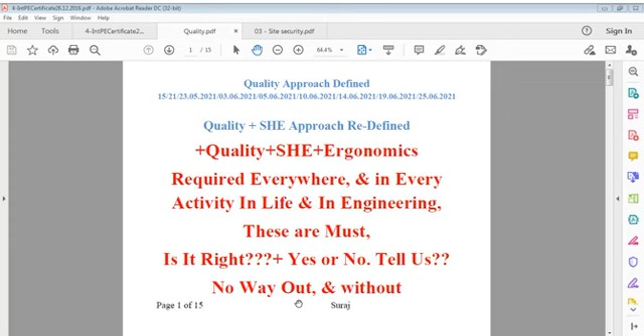It's not a question of spiritualism. It's a question of analytical facts. If we simply analyze, it's interesting, because without analysis I can't justify anything. If I talk based on analysis, on calculations, on logic, on certain forms, on certain references, we can say that the answer, that explanation, is much more powerful than if I just throw something out.

If I say I don't know the reason, but I said that, and I act like that, saying okay, I have told you, you do this, don't think about this, I have decided on this, and you do it - it means I don't know the answer, and I want that person to do it without knowing why. This type of act stands a long distance from quality.

Our quality thinking has gone in vain. We all know COVID is working very fast. It has consolidated its position all over the world, and millions of people have lost their lives because of this power of God. Better you call it the power of God - when something is beyond your control, you cannot answer to that. So it is power of God. What research would say, what investigations would say, I'm not involved with that.

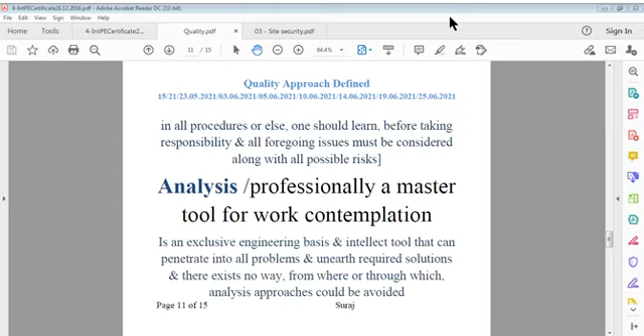Organization of safety on sites, about how to organize on site or on projects our quality system, or you can say safety system.

In construction, we work on sites. That is very much true. Sites are our workshops, sites are our manufacturing unit, sites are our factory, and sites are our operational research centers. Site is our home for work. Generally, engineers spend their time on sites much more than what they spend at home.

General working on site is more than 12 hours, 10 hours, depending on requirements, and then maybe 1 hour or more to and fro journey. So most of the time of your life, in your professional project life, you spend on your work.

That is a fact. Particularly in our discipline, construction, there is no time limit. Contractually, there is a contractual time limit, but physically you have to work as if it is your own work. If you think this is not my work, this is the contractor's work or the employer's work, then you may not be able to concentrate on that because your mind is different.

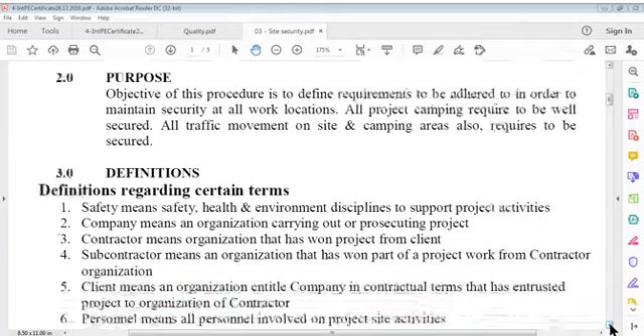There are certain definitions also, we have discussed many times, we have to repeat that for refreshing. It says safety. Safety means safety, health, and environment - disciplines to support project activities. We have learned it, and ergonomics also added to that. Safety means that, and we can say company

from client. It's also clear. You may call contractor, right?

Sorry, some gastric.

Subcontractor means an organization that has won part of the project work from the contractor organization. We have to understand these points very well. We may be engineer or non-engineer, but we may be public.

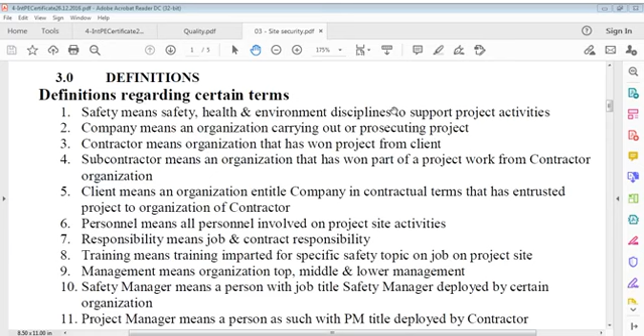Now, client means, I'm drinking water.

Client means an organization that's entitled as company in contractual terms, that has entrusted the project to the organization of the contractor.

Now personnel means all personnel involved in project site activities. Responsibility means job and contract responsibility. And training means training imparted for a specific safety topic on the job, on project site.

Management means organization - top, middle, and lower management or organization. Safety manager or leader means a person with job title safety manager or leader, deployed by a certain organization.

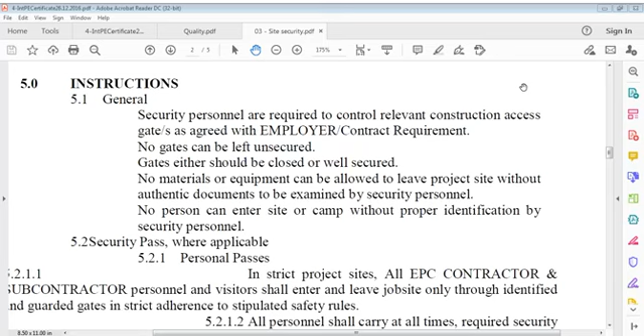This is chapter 2 of safety, health, environment.

I don't know what's happened to me. What's going on?

No person can enter site or camp without proper identification by security personnel, and security passes are available where required, along with personal passes.

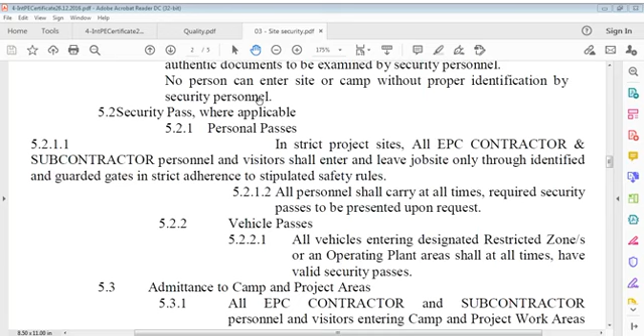All EPC contractors and subcontractors, personnel and visitors entering camp and project work areas must be in possession of required security passes or identification documents.

Personnel shall not be allowed to carry a camera of any kind unless a permit has been obtained from the employer and security police. Personnel and visitors entering camp or project work areas must be in possession of required security passes or identification documents, whichever is applicable.

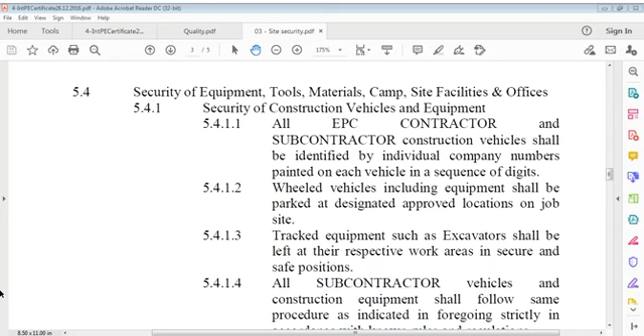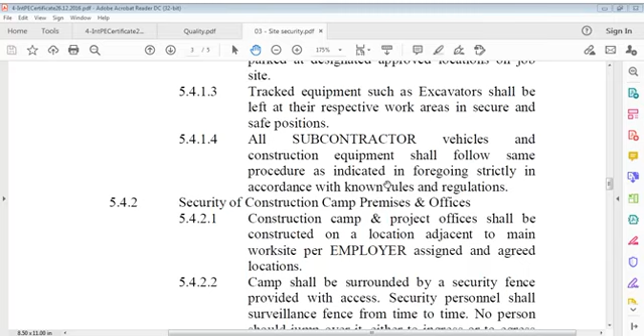Tracked equipment such as excavators shall be left at their respective work areas in secure and safe positions.

All subcontractor vehicles and construction equipment shall follow the same procedure as indicated in the foregoing, strictly in accordance with known rules and regulations.

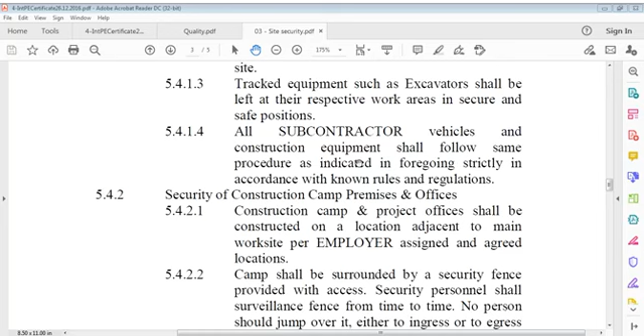Construction camp premises and offices security: the camp shall be surrounded by a security fence provided with access. Security personnel shall surveil the fence from time to time. No person should jump over it, either to ingress or to egress.

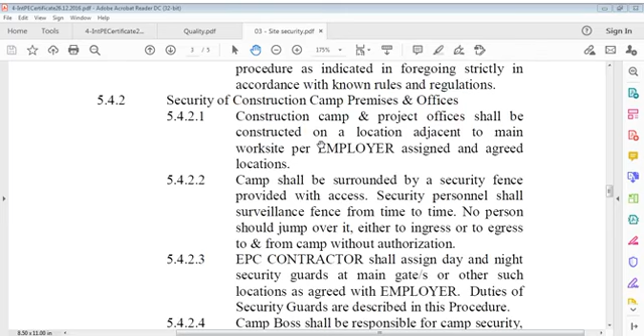The camp shall be... other such locations as agreed with the employer. EPC contractors shall assign day and night security guards at main gates or other such locations as agreed with the employer.

Duties of the security guard are described in this procedure. The camp boss, or camp leader, you can call camp organizer, shall be responsible for camp security, and shall ensure that records identify all permanent residents and that all camp visitors are logged in and logged out.

Facilities shall be guarded by security guards around the clock to avoid unauthorized access by miscreants.

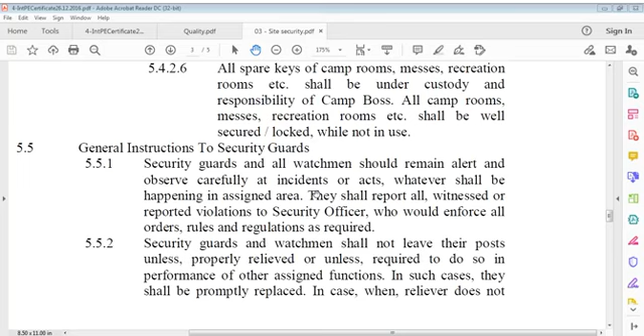General instructions to security guards: security guards and all watchmen should remain alert. All camp rooms, messes, recreation rooms, etc. shall be well secured or locked while not in use. They must be alert and observe carefully incidents or acts happening in the assigned area, and shall report all witnessed or reported violations to the security officer of that area.

General instructions to security guards are very easy: security guards and all watchmen should remain alert and observe carefully incidents or acts happening in the assigned area. They shall report all witnessed or reported violations to the security officer, who would enforce all appropriate action.

Security guards and watchmen shall not leave their posts unless properly relieved or unless required to do so in performance of other assigned functions. In such cases, they shall be promptly replaced. In case the reliever does not arrive...

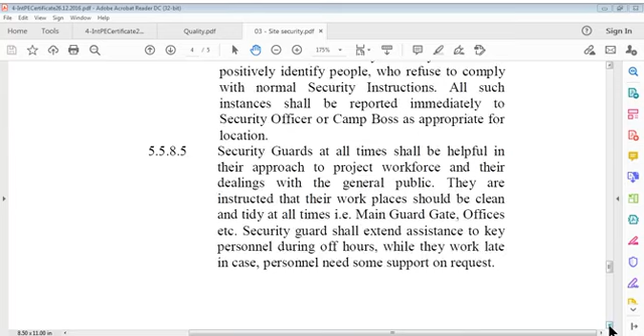Photography on site shall only be allowed if prior written permission is obtained in accordance with employer rules and regulations, and a permit has been obtained from security police.

Following agreement with the employer and/or its security agencies, it is envisaged that employee ID badges shall incorporate an electronic system to afford access and egress to the camp for employer, contractor, and subcontractors. Employees of located subcontractors whose workforce resides outside the project security fence shall also be required to swipe entries and exits to the project at assigned locations when the site is located in non-prohibited areas.

Requirements of many considerations may not work in every case. For example, photographs could be allowed without formal permission, but identification of persons available on site should be recorded, as this is state-of-art practice all over the globe for security reasons.

A visitors' log shall always be maintained, as it tells how many persons have been available on site during the day. Such information may assist in head count in case of a fire breakout.

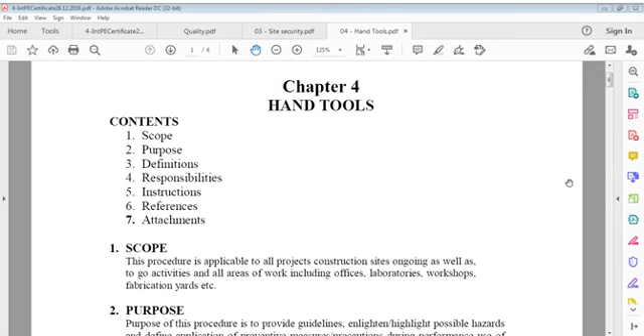We say in every statement there is scope, purpose, definitions, responsibilities, instructions, references, and attachments, and it could go on. Now in hand tools, we can say this is the procedure. This statement or procedure is applicable to all projects and construction sites, ongoing as well as...

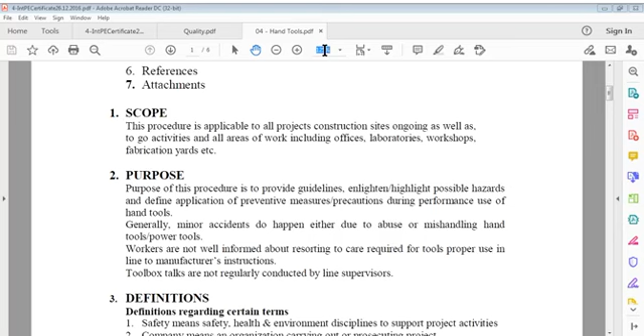To go activities and all areas of work including offices, laboratories, workshops, and purpose is to provide guidelines, enlighten, highlight possible hazards, and define application of preventive measures, precautions during performance, use of hand tools.

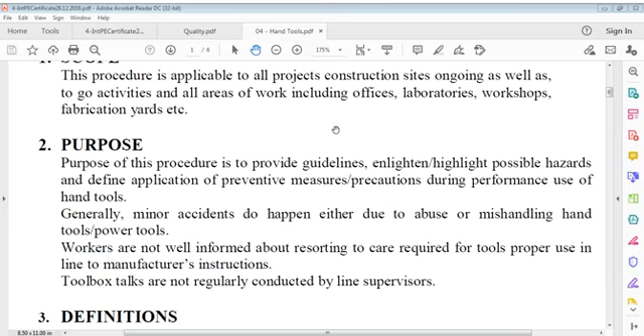Generally, minor accidents do happen either due to abuse or mishandling hand tools, power tools. Workers are not well informed about resorting to care that is required for tools' proper use in line to manufacturer's instructions. Toolbox talks are not regularly conducted by line supervisors.

In definitions of safety, safety means SHE, which means safety, health and environment, disciplines to support project activities, and company means an organization carrying out or prosecuting project or ownership of project. Contractor means organization that has won project from client as a contract. Subcontractor means an organization that has won part of project work from contractor organization. And client means owner, an organization and title company in contractual terms that has entrusted project to the contractor organization.

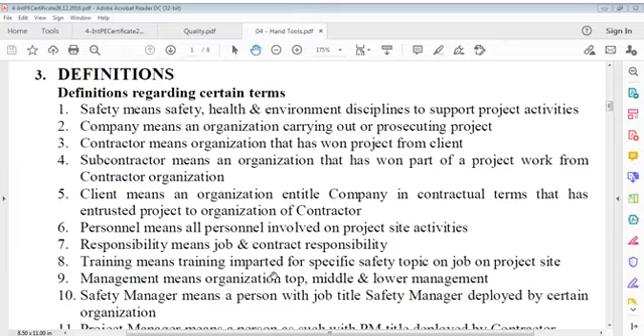Personnel means all personnel involved on project site activities, whatsoever they are, from whatever organization they come in, from employer or from engineer or from contractor or from subcontractor or from whosoever source it comes in, and they stay on site. Responsibility means job and contract responsibility. Training means training imparted for a specific safety topic on job on project site, whatever topic that may be, special or particular.

Organization management means top, middle as well as lower category. Safety leader, safety manager means person with job title safety leader or safety manager deployed by certain organization. Project leader means a person with project manager title or agent title deployed by contractor. An engineer means person appointed by owner or client company for an overall project responsibility. Project owner.

Employer is project owner. Now responsibilities in general respecting certain contract position. There are certain positions like project leader, project manager, project director, site manager, site leader, site organizer, site safety organizer or officer, construction organizer, construction leader, construction manager, project site engineer, site safety officer, safety engineer, safety representative, site lead, foreman, general foreman.

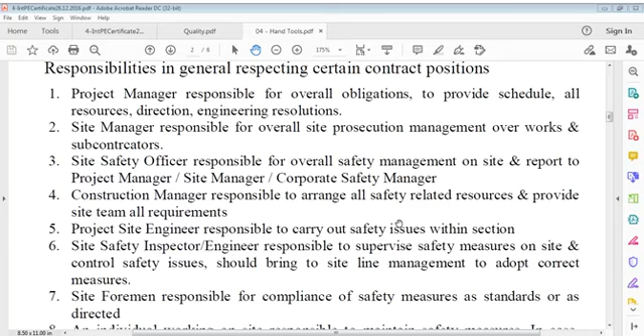Site safety officer responsible for overall safety, lead safety organization on site and report to project manager, project leader, site manager, site leader, corporate safety manager, corporate safety leader. Construction lead, construction manager responsible to arrange all safety related resources and provide site team all requirements necessary for upkeep of housekeeping and safety on site for all activities.

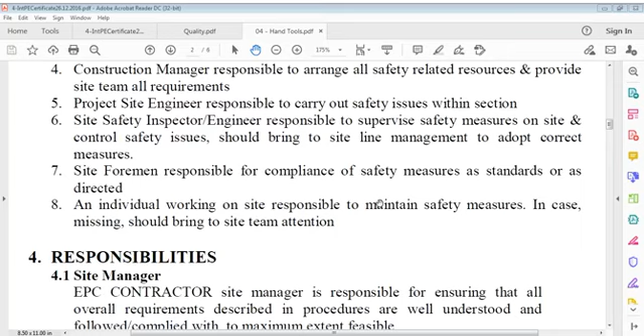Project site engineer responsible to carry out safety issues within section and also care of other sections too if required. Site safety inspector, engineer responsible to supervise safety measures on site and control safety issues, should bring to site line organization, line barriers, line management, line lead to adopt correct measures. Site foreman is responsible for compliance of safety measures as standards or as directed. An individual working on site is responsible to maintain safety measures, in case missing should bring to site team attention.

Now, certain responsibilities. There are actually two main persons in this case, site manager and site safety manager, HSE manager. They are main responsible for safety arrangements. Site manager, that is EPC contractor, is responsible for ensuring that all overall requirements described in procedures are well understood and followed, complied with to maximum extent feasible. An HSE manager or leader of EPC contractor is responsible for ensuring that EPC contractor supervising personnel and all subcontractors' supervising personnel are familiar with in all respects about provisions within this procedure.

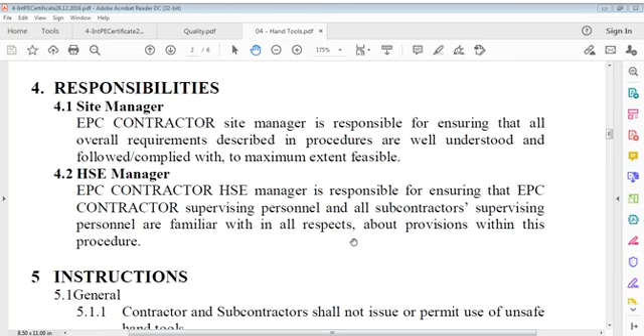This means they both have to make sure that communication is clear, message is clear, not necessarily documentary, but both documentary as well as verbatim, that people on site, personnel on site, know how to keep site tidy and how to take responsibility, how to do responsibility towards SHE.

Now certain instructions we talk of in general. Contractor and subcontractors shall not issue or permit use of unsafe hand tools. It's duty of contractor, because contractor buys tools to work. These tools should be safe for people to work, because money is paid to tool purchase and money is also paid to workers for working. And if tools are not safe, how can work move on and how can risk be tolerated.

Wrenches, including adjustable pipe end with socket, shall not be used when jaws are sprung to the point that spillage occurs. Impact tools such as drift pins, wedges and chisels shall be kept free of mushroomed heads.

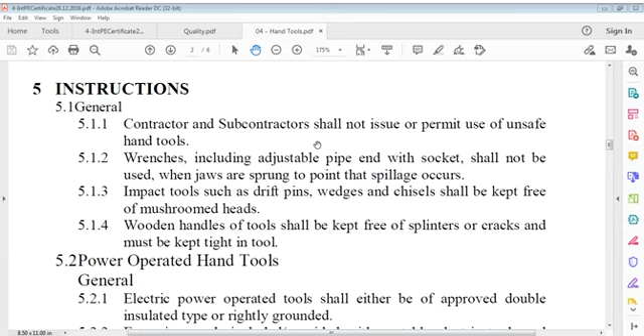Wooden handles of tools shall be kept free of splinters or cracks and must be kept tight in the tool. This is general. Now, power operated hand tools.

Electric power operated tools shall either be of approved double insulated type or rightly grounded. Extension cords included or provided with portable electric tools and appliances shall be made of 3-wire type. Use of electric cords for hoisting or lowering tools shall not be permitted. Pneumatic power tools shall be secured to hose or whip by some suitable anchorage to prevent the tool from getting accidentally disconnected.

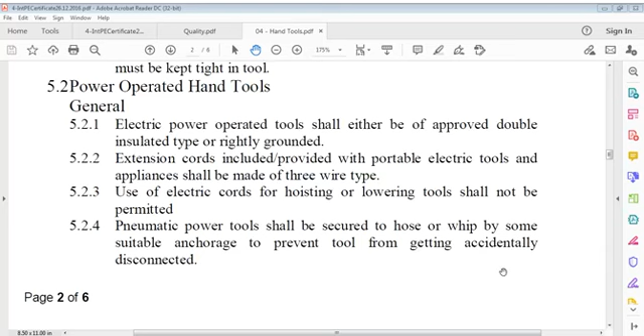All hoses exceeding half inch inside diameter shall have a safety device either at source of supply or at branch line to reduce pressure in case of hose failure.

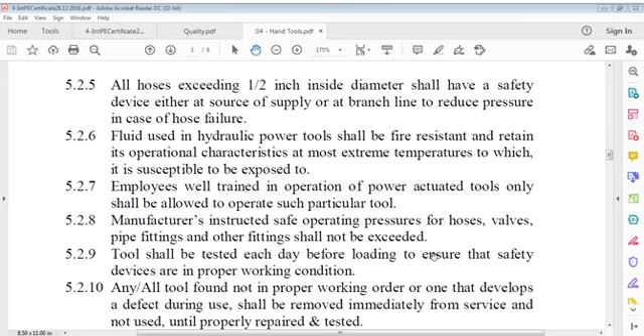Fluid used in hydraulic power tools shall be fire resistant and retain its operational characteristics at most extreme temperatures to which it is susceptible to be exposed to. It's a very important point. Fluid used in hydraulic power tools shall be fire resistant and retain its operational characteristics at most extreme temperatures to which it is susceptible to be exposed to.

Employees well trained in operation of power actuated tools only shall be allowed to operate such particular tools. Manufacturer's instructed safe operating pressures for hoses, valves and pipe fittings and other fittings shall not be exceeded.

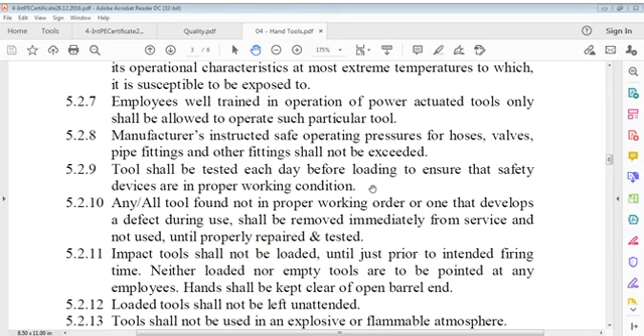Tools shall be tested each day before loading to ensure that safety devices are in proper working condition. Any or all tools found not in proper working order, or one that develops a defect during use, shall be removed immediately from service and not used until properly repaired and tested.

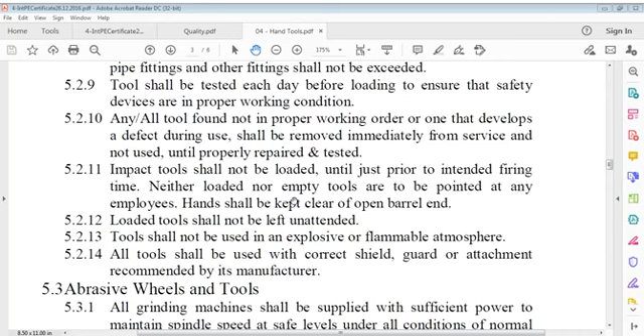Impact tools shall not be loaded until just prior to intended firing time. Neither loaded nor empty tools are to be pointed at any employees. Hands shall be kept clear of open barrel end. Loaded tools shall not be left unattended.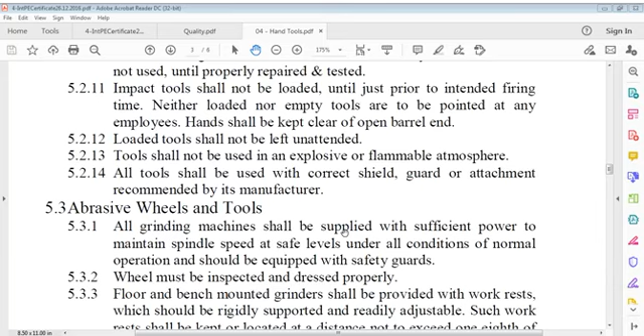Tools shall not be used in an explosive or flammable atmosphere. All tools shall be used with the correct shield, guard, or attachment recommended by its manufacturer.

Abrasive wheels and tools. All grinding machines shall be supplied with sufficient power to maintain spindle speed at a safe level under all conditions of normal operation and should be equipped with safety guards. Wheel must be inspected and dressed properly.

Floor and bench mounted grinders shall be provided with work rests, which should be rigidly supported and readily adjustable. Such work rests shall be kept or located at a distance not to exceed 1/8 of an inch from surface of wheel.

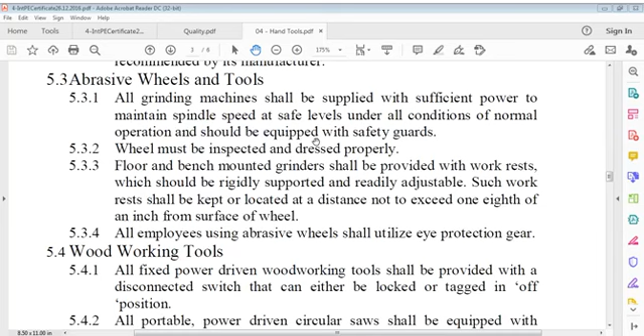All employees using abrasive wheels shall utilize eye protection gear.

Wood working tools. All fixed power driven woodworking tools shall be provided with a disconnecting switch that can either be locked or tagged in off position. All portable power driven circular saws shall be equipped with guards above and below the base plate or shoe.

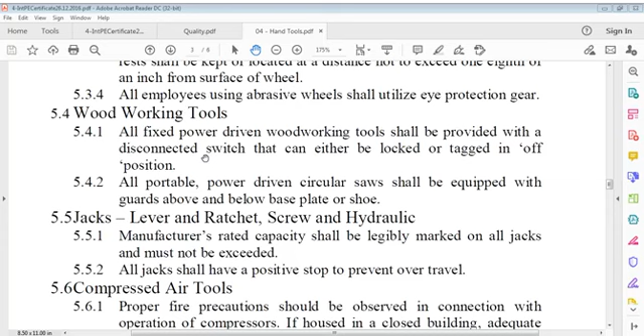Jacks: lever and ratchet, screw and hydraulic. Manufacturer's rated capacity shall be legibly marked on all jacks and must not be exceeded. All jacks shall have a positive stop to prevent over travel.

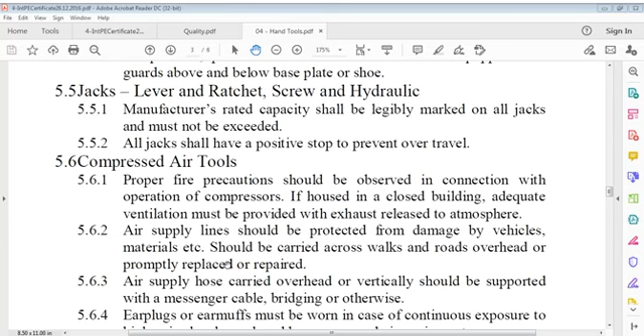Compressed air tools. Proper fire precautions should be observed in connection with the operation of compressors. If housed in a closed building, adequate ventilation must be provided with exhaust released to atmosphere. Air supply lines should be protected.

Air supply lines should be protected from damage by vehicles, materials, etc. Those carried across walks and roads should be carried overhead or promptly replaced or repaired. The air supply hose carried overhead or vertically should be supported with a messenger cable, bridging or otherwise.

Earplugs or earmuffs must be worn in case of continuous exposure to high noise levels produced by compressed air equipment.

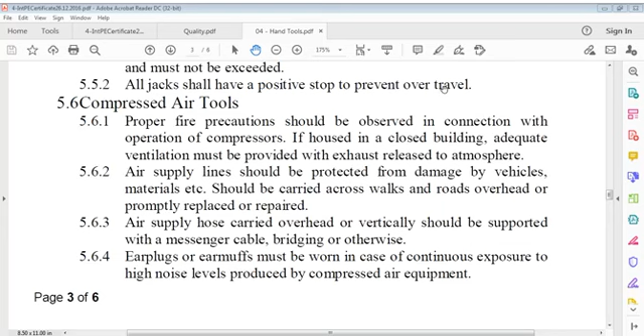Manual tools. Manual tools, important point.

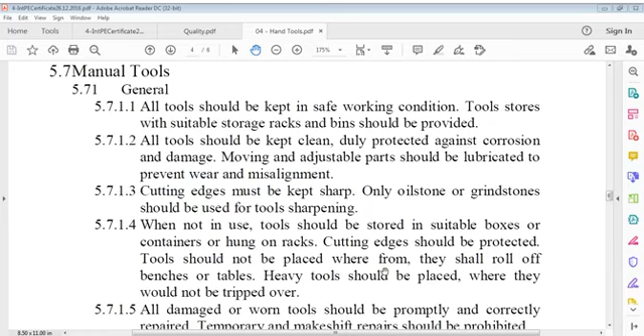When not in use, tools should be stored in suitable boxes or containers or hung on racks. Cutting edges should be protected. Tools should not be placed where they shall roll off benches or tables. Heavy tools should be placed where they would not be tripped over.

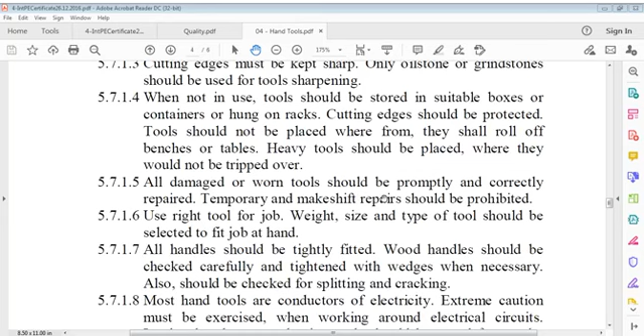All damaged or worn tools should be promptly and correctly repaired. Temporary and makeshift repairs should be prohibited.

Use the right tool for the job. Weight, size and type of tool should be selected to fit the job at hand. All handles should be tightly fitted. Wood handles should be checked carefully and tightened with wedges when necessary, and checked for splitting and cracking.

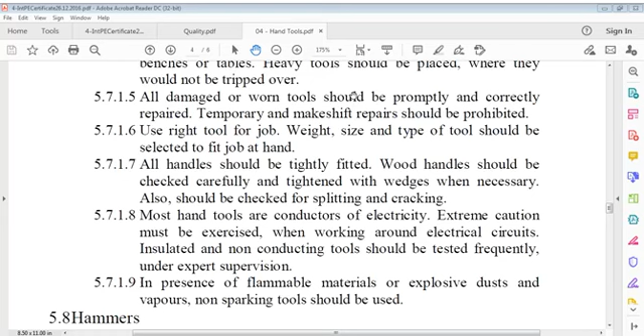Most hand tools are conductors of electricity. Extreme caution must be exercised when working around electrical circuits. Insulated and non-conducting tools should be tested frequently under expert supervision. In the presence of flammable materials or explosive dusts and vapors, non-sparking tools should be used.

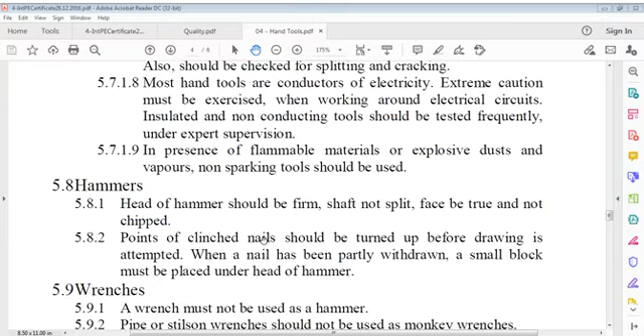Hammers. Head of hammer should be firm, shaft not split, face true and not chipped.

Points of clinched nails should be turned up before drawing is attempted. When a nail has been partly withdrawn, a small block must be placed under the head of the hammer.

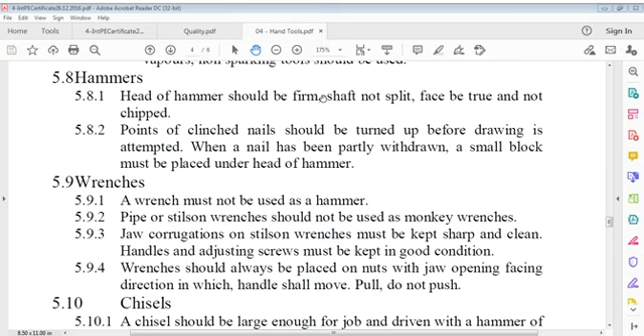Wrenches. A wrench must not be used as a hammer. Pipe or Stilson wrenches should not be used as monkey wrenches. Jaw corrugations on Stilson wrenches must be kept sharp and clean. Handles and adjusting screws must be kept in good condition.

Wrenches should always be placed on nuts with jaw opening facing the direction in which the handle shall move. Pull, do not push.

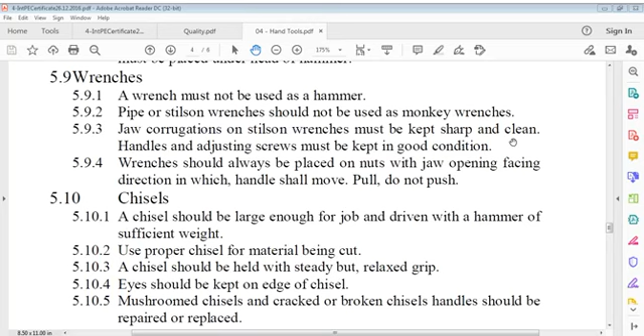Chisels. A chisel should be large enough for the job and driven with a hammer of sufficient weight. Use the proper chisel for the material being cut. A chisel should be held with a steady but relaxed grip. Eyes should be kept on the edge of the chisel.

Mushroomed chisels and cracked or broken chisel handles should be repaired or replaced. Goggles should be worn when chipping, so that chippings land away from the person undertaking the chipping. Both the person working and others may be protected with adequate screening. When sharpening, the original shape and angle must be maintained.

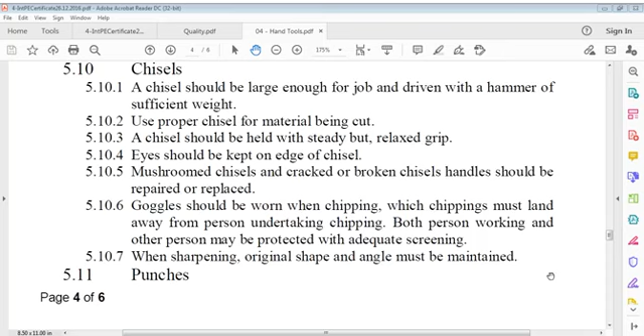Punches. Punches should be straight, suitable and heavy enough for the work. Points of center punches should be accurately ground at all times. Starting and pin punches should be square.

Punches should be started with light taps and held securely, especially on rounded surfaces. When knocking out rivets, pin work must begin with a starting punch and finish with a pin punch.

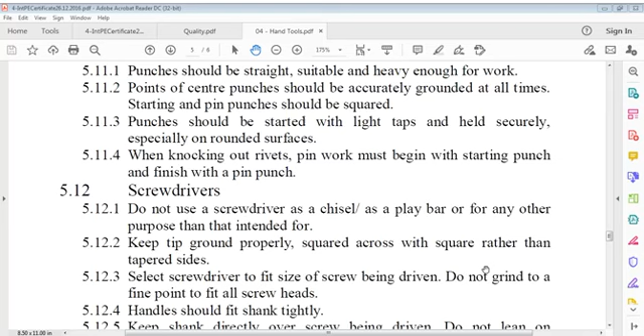Screwdrivers. Do not use a screwdriver as a chisel, a pry bar, or for any other purpose than that intended. Keep tip ground properly, squared across with a square rather than tapered sides. Select a screwdriver to fit the size of the screw being driven. Do not grind to a fine point to fit all screw heads.

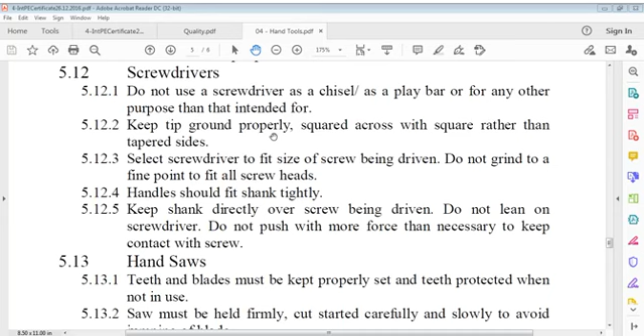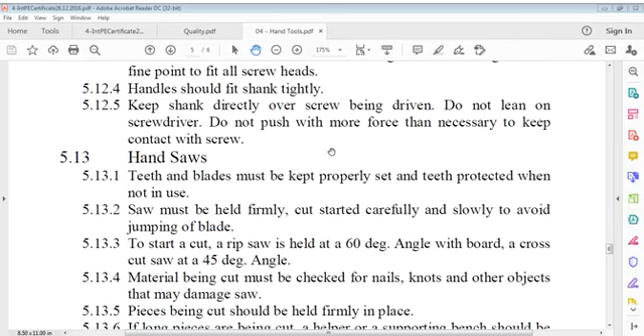Handles should fit the shank tightly. Keep the shank directly over the screw being driven. Do not lean on a screwdriver. Do not push with more force than necessary to keep contact with the screw.

Hand saws. Teeth and blades must be kept properly set and teeth protected when not in use. The saw must be held firmly, and the cut started carefully and slowly to avoid jumping of the blade.

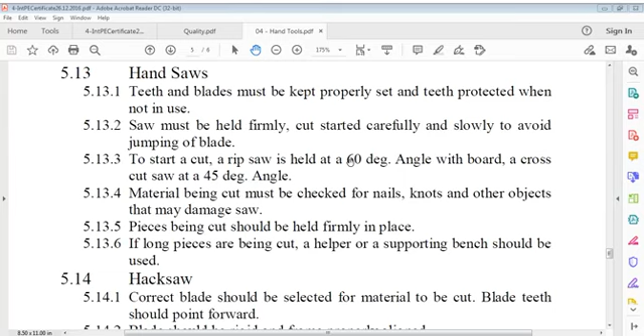Material being cut must be checked for nails, knots and other objects that may damage the saw. Pieces being cut should be held firmly in place.

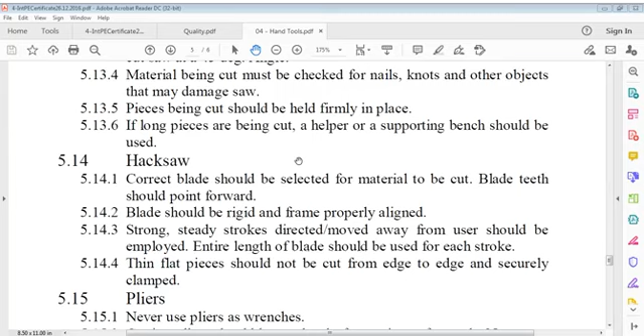If long pieces are being cut, a helper or a supporting bench should be used. Hacksaw.

Correct blade should be selected for the material to be cut. Blade teeth should point forward. Blade should be rigid and frame properly aligned. Strong, steady strokes directed and moved away from the user should be employed. The entire length of the blade should be used for each stroke.

Thin flat pieces should not be cut from edge to edge, and should be securely clamped.

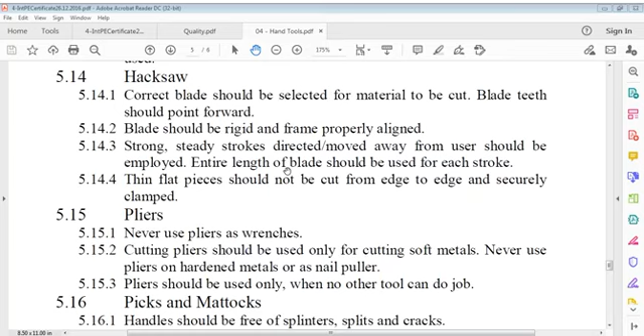Pliers. Never use pliers as wrenches. Cutting pliers should be used only for cutting soft metals. Never use pliers on hardened metals or as a nail puller. Pliers should be used only when no other tool can do the job.

Picks and mattocks. Handles should be free of splinters and cracks. The head should be firmly affixed to the handle. When in use, it must be ascertained that the area at the rear and on the sides is clear when swinging a pick or mattock.

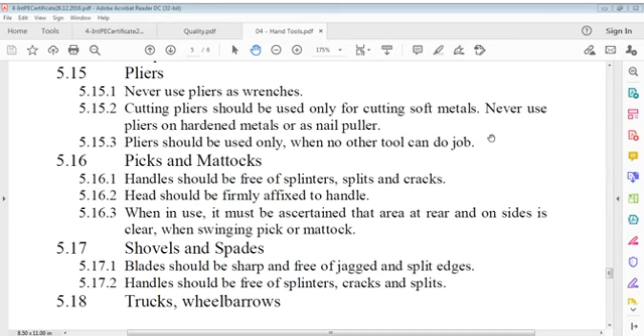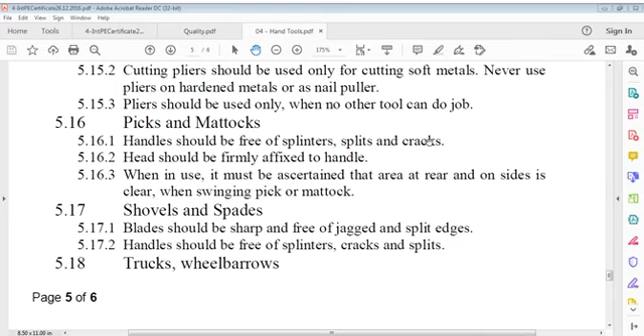Shovels and spades. Blades should be sharp and free of jagged and split edges. Handles should be free of splinters, cracks and splits.

Trucks, wheelbarrows. Hand trucks and wheelbarrows should be selected for the job. Their frames should be strong and straight. Wheels should be strong and well secured to frames. Bodies must be kept clean and free of jagged edges. Extreme care must be exercised when using ramps and walkways.

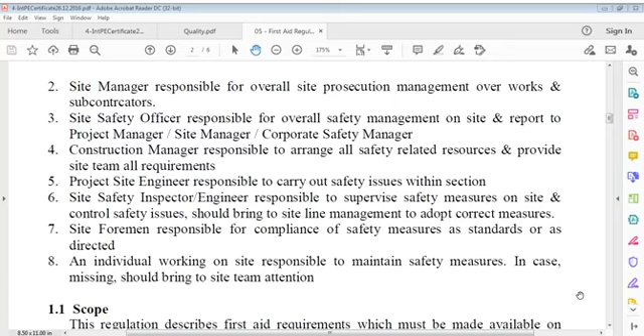We may say the site foreman is responsible for compliance of safety measures as per standards or as directed. An individual working on site is responsible to maintain safety measures, and in case something is missing, should bring it to site team attention.

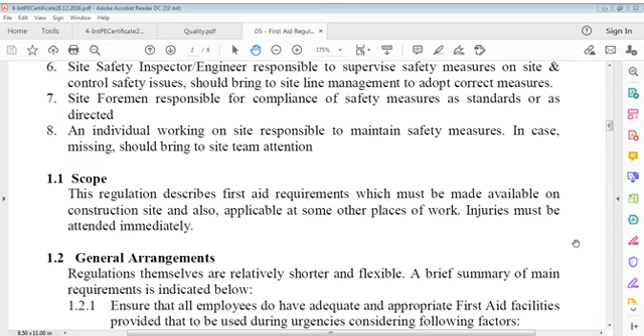An individual working on site is responsible to maintain safety measures, and in case something is missing, should bring it to the site team's attention. This regulation describes first aid requirements which must be made available on construction site and also applicable at some other places of work. Injuries must be attended immediately.

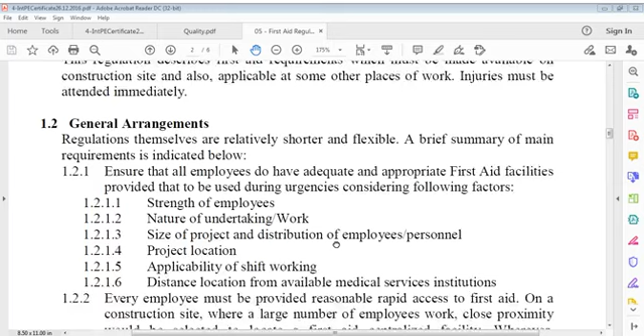General arrangement. Regulations themselves are relatively shorter and flexible. A brief summary of main requirements is indicated. Ensure that all employees do have adequate and appropriate first aid facility provided to be used during emergencies, considering the following factors.

Everywhere first aid should be available on site, which can be used during emergencies. We have to consider strength of employees, nature of undertaking work, size of project, and distribution of employees personnel, project location, applicability of shift working, and distance location from available medical services institutions. What we have to consider? How many employees are there, what type of work is being undertaken, what is size of project, distribution of employees, where the project is located, whether shift working is applicable, and distance location.

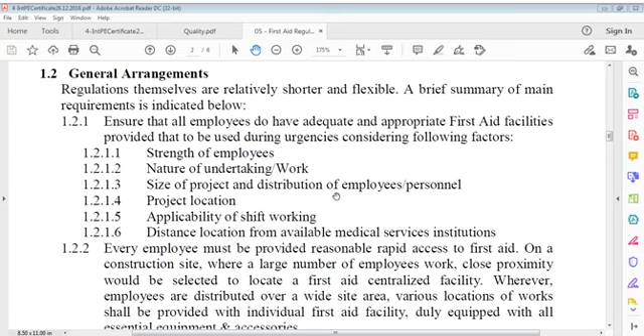So these are points we have to consider: how many workers are there, what type of work is going on, what size of project, location, shift working, distance to available medical services institutions. Every employee must be provided reasonable rapid access to first aid on a construction site where a large number of employees work. Close proximity would be selected to locate a first aid centralized facility wherever employees are distributed over a wide site area.

Various locations of work shall be provided with individual first aid facility, duly equipped with all essential equipment. Then we can see distance location for available medical service institutions. Every employee must be provided reasonable rapid access to first aid on a construction site where a large number of employees work. Close proximity would be selected to locate a first aid centralized facility where employees are distributed over a wide site area. Various locations of work shall be provided with individual first aid facility, duly equipped with all essential equipment and accessories.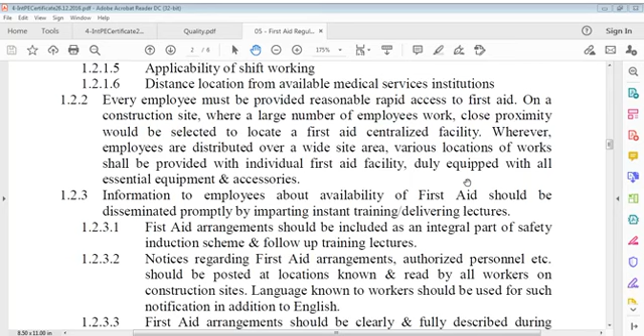Information to employees about availability of first aid should be disseminated promptly by imparting instant training, delivering lectures. First aid arrangement should be included as an integral part of the safety induction scheme and follow-up training lectures. Notices regarding first aid arrangements, authorized personnel, etc., should be posted at locations known and read by all workers on construction sites.

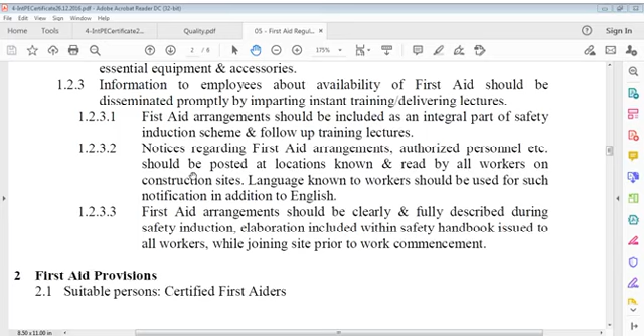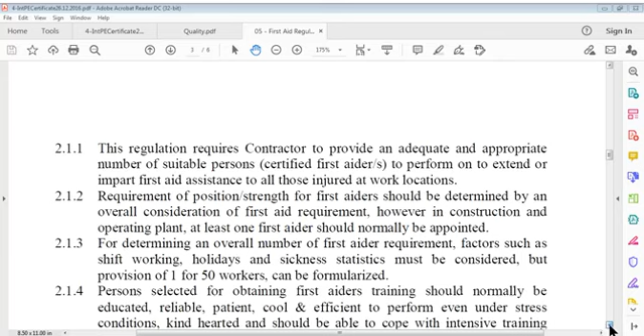First aid provisions. This regulation requires contractors to provide an adequate and appropriate number of suitable persons, certified first aiders, to extend or impart first aid assistance to all those injured at work locations. Requirement of position strength for first aiders should be determined by an overall consideration of first aid requirements. However, in construction and operating plant, at least one first aider should normally be appointed. For determining an overall number of first aiders...

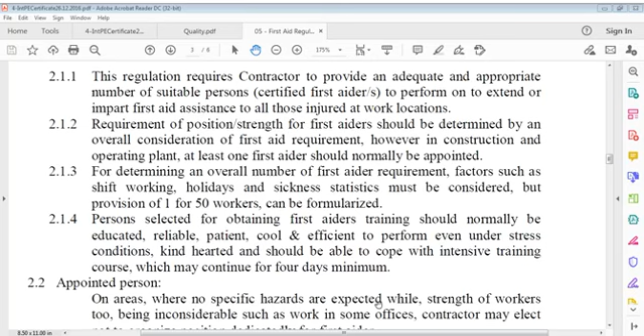I think I will take it a little later because it's a long one and I've discussed this with everyone. This is about safety and first aid, which are very important from every viewpoint. It should be safe for everybody. I'll take up this along with permit to work, housekeeping, safety training. So I'll take this one later on, better.